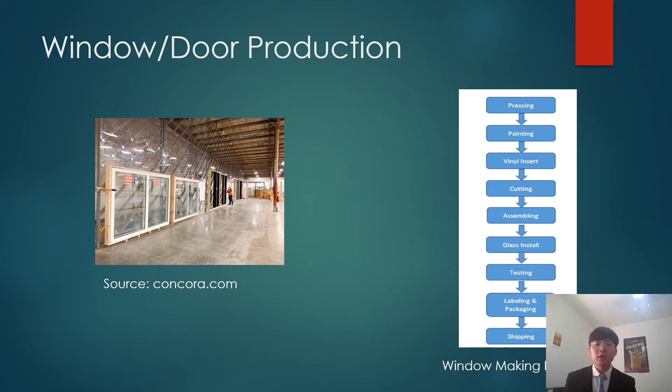I will talk about the incentives for Peerless to make changes and pursue a long-term sustainable industry and to become a competitor in the window making market.

Peerless always focuses on building a sustainable industry, investigating and implementing solutions to reduce waste and prevent pollution. They also won a Green Award from the US Glass for their effort in protecting the environment.

Let's talk about Sustainable Materials Management, SMM. SMM includes projects that help the company use materials better, including reducing, recycling, and reusing. SMM projects help the industry reduce waste and prevent pollution, protect the environment, while increasing efficiencies and making extra financial savings.

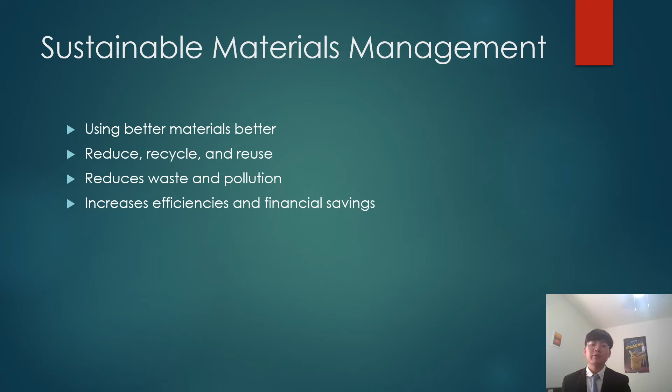I will talk about the waste management hierarchy. For pollution prevention, it will go from source reduction to reuse, recycling, and other treatment, and finally the last option is disposal, sending the waste to the landfill.

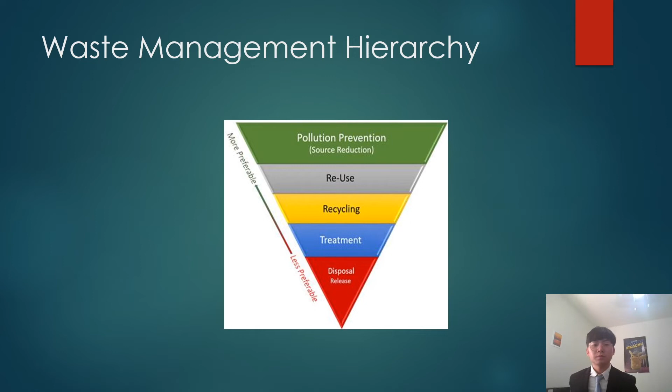Here is the table of my project summary. I have three main projects this summer: recycling vinyl scrap, using plastic block pallets instead of wooden pallets, and increasing the transfer efficiency for paint coating. Another project is reducing the extrusion dies and wastewater at the press department, but this project is not investigated and needs more research in the future as required by the company.

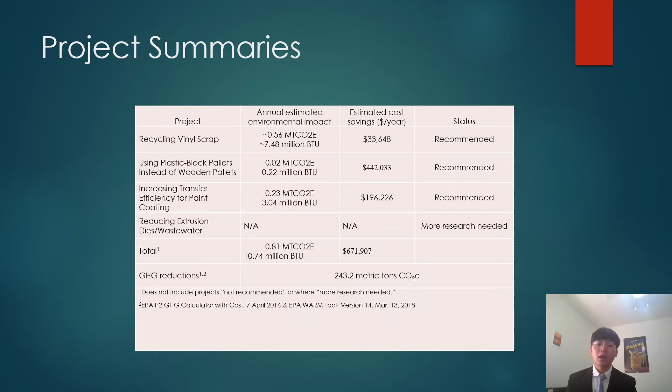For each process with recommendations, it will have the following environmental, social, and economic impacts, including greenhouse gas emissions, annual savings, energy waste, and labor hours. For the three main projects, I have worked on research and have recommendations. However, the last project needs more research in the future.

Let's start with the vinyl scrap. At Peerless, they only order the 24-foot vinyl strips. In the past, they used to order vinyl strips with many different sizes. However, it's not effective because employees have spent more time categorizing and storing them. So now they only order the 24-foot vinyl strips.

They use the vinyl strips and cut them down into shorter lengths and throw away the leftover. The vinyl scrap comes from two main sources: the initial cutting and other trimming processes. After that, the vinyl waste will be transferred to the landfill.

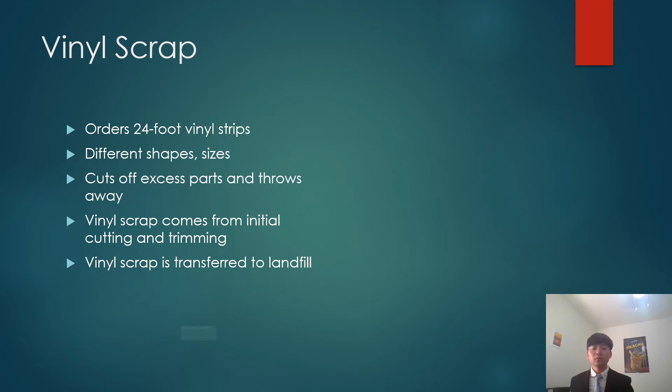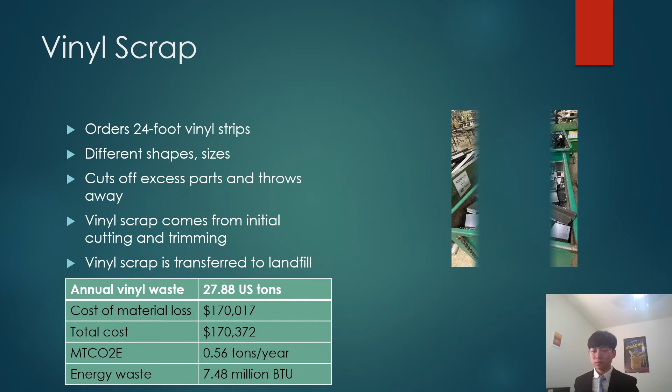With this amount of vinyl waste, the annual vinyl waste for a year at Peerless is 27.88 US tons, and it costs for the material loss $170,000 for a year, with 0.56 metric ton of CO2 emissions per year and energy waste of 7.48 million BTU. This is a hopper of the vinyl scrap at Peerless.

For the solution for the vinyl scrap, I have three main solutions. The first is process optimization: Peerless can make different hoppers with different compartments and categorize the vinyl leftovers based on their sizes and store them for future use. Peerless can calculate what kind of vinyl strips they should keep and for how long before throwing them away, based on customer orders and purchasing reports.

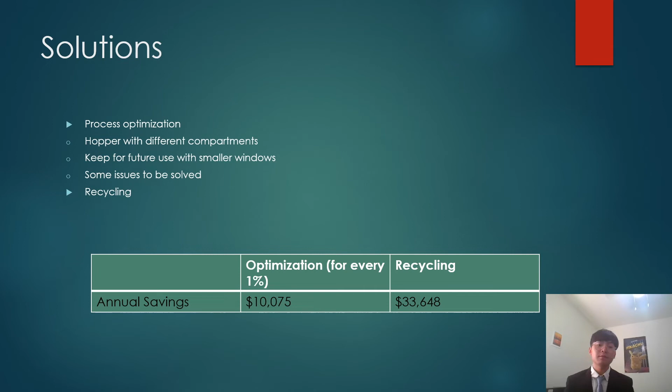For the wooden pallets at Peerless, because all of the windows and doors are customized, the pallets for handling them are also customized, and that's why all the pallets at Peerless are single use. For that reason, they don't need pallets that are so durable and strong.

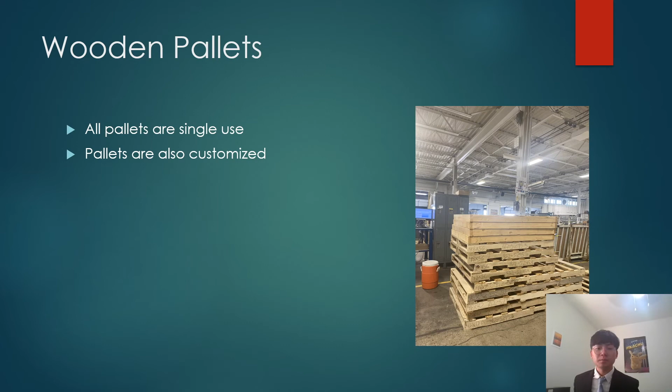With that amount of wooden pallet waste, it will create 526,000 pounds of wooden waste from 6,500 pallets a year, which costs the company $486,000 a year, with 243 metric tons of CO2 emission, and the energy waste is 70 million BTU.

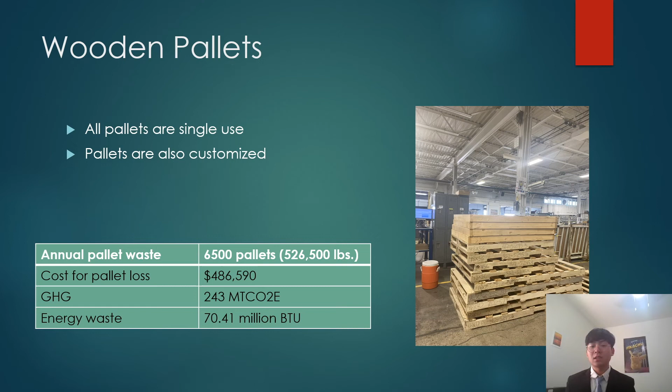For the solutions for the wooden pallets, the first solution is using alternative materials like paper, plastic, and foam. The most recommended solution is using paper pallets because they are lighter and even cheaper. Because all the pallets are single use, it's not recommended to use plastic or foam pallets because they are more expensive than the wooden pallets and will cost the company more.

The second solution is using plastic block pallets. This is also the most recommended solution because these plastic block pallets are reusable and very strong and durable. They can assemble many plastic blocks together to make different sizes of pallets, and it can also help them handle certain situations or small orders.

The next solution is recycling. They can contact recycling companies, and some companies allow buying the pallets with cost ranging from $1 to $4 each. For $4, that would be pallets in the best condition with no damage and standard sizes. However, since Peerless's pallets are customized, it's really hard to get that price, and the pallets sold to recycling companies will cost about $1 to $2 each.

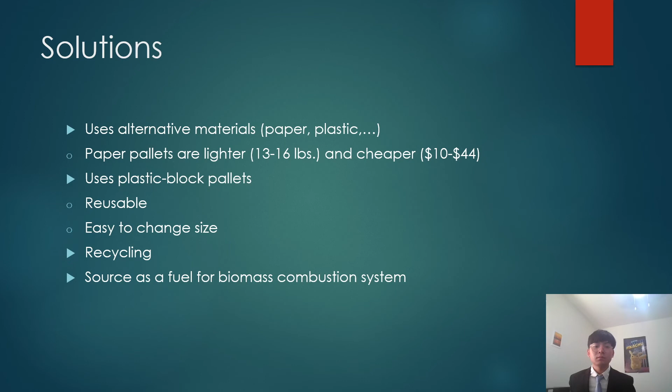With those solutions implemented by Peerless, it can have the following environmental, economic, and social impacts. Using plastic block pallets can create $442,000 of annual savings, and using corrugated paper pallets will create over $300,000 a year in savings. For greenhouse gas emission, it will be 0.02 metric tons and 8.56 metric tons respectively.

For the energy waste, it's 0.22 million BTU and 9.83 million BTU respectively. And for labor hours, it's 1 hour and 65 hours respectively, using plastic block pallets or corrugated paper pallets.

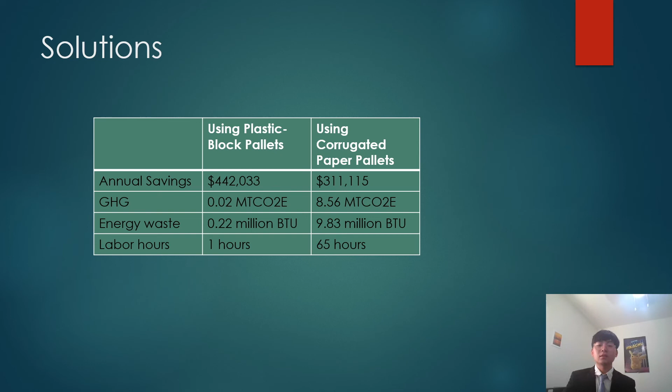For the last main project, it is painting powder. At Peerless, they use the reclaimed painting system to coat the metal frames. They use two main types of paint powders, including AAMA 2604 and AAMA 2605, and they repel each other. That's why the mixture of them will be treated as waste.

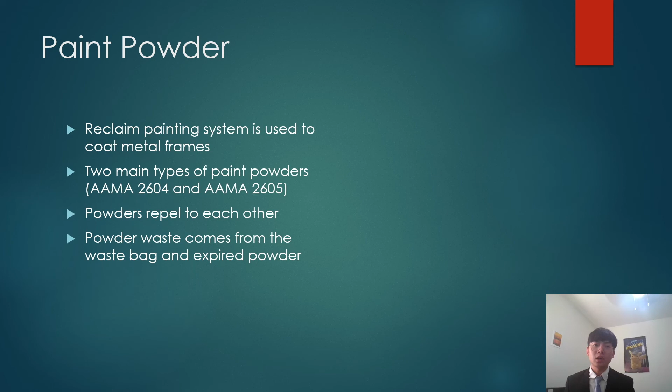With this to be seen, the transfer efficiency for coating the metal frames at Peerless for now is around 72%, which is already high, but we can make some changes in the techniques and equipment to even increase it to a higher transfer efficiency.

With that amount of waste, it will create an annual waste of 35,000 pounds of powder waste a year, with a total cost of loss of $550,000 a year, with 0.36 metric tons of CO2 emission and 4.73 million BTU.

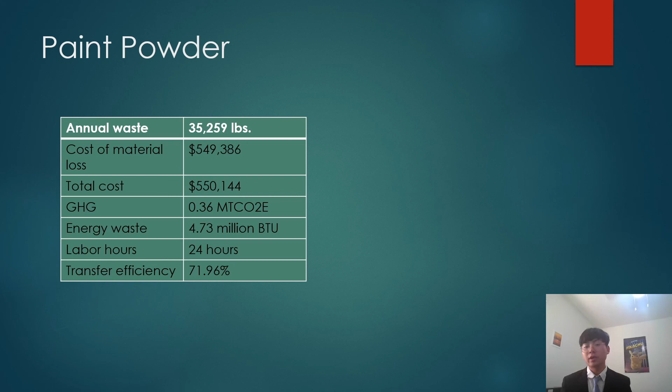For the solutions, the first is scheduling and optimization. The company should have some apps for managing paint powder use, and employees should have communications to reduce the amount of powder that becomes expired. They should frequently change the schedule, every week or even every day, when switching between types of powder, to reduce mixing them and to reduce throwing away expired powder.

The second solution is reusing or recycling paint powder. They can reclaim the powder and reuse it, or even use it to paint other materials in the company, so they can save money on purchasing paint for those materials.

The next solution is repurposing. They can reformulate the paint powder or add other chemicals to make them into plastic parts or non-cosmetic components, or add them to cement or sound-canceling products.

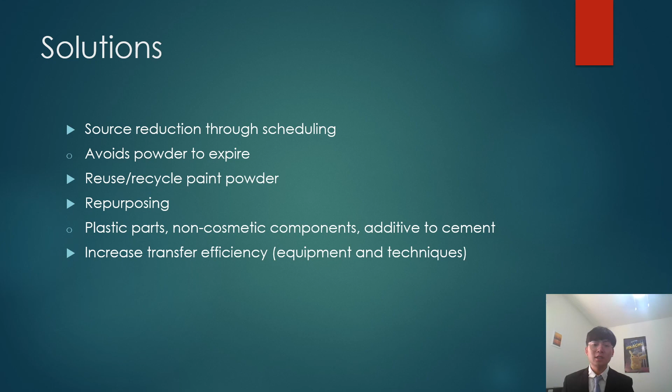For this recommendation to be practiced, it will save $196,000 if we improve the transfer efficiency from 72% to 85%. And for scheduling, for every 10% of the powder saved from being thrown away due to expiration, they will save $12,000 a year.

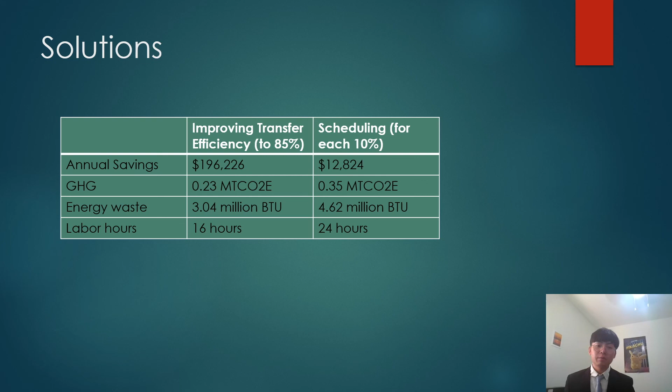Another project is the extrusion dies and the wastewater at the press department. The extrusion dies are cleaned using sodium hydroxide and sodium bisulfate, and the solid chemical waste will be packed in a box and sent to the landfill. The solution waste will be sent to the sewer, and the extrusion dies with major damage will also be sent to be recycled.